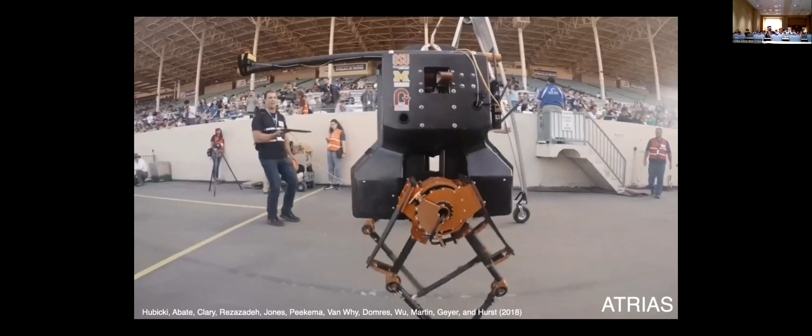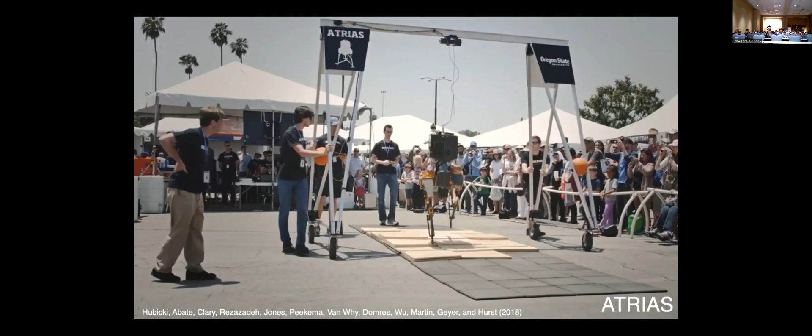In terms of my background, it isn't sort of in safety critical systems per se. My background is in legged locomotion. This was some of my PhD work here, along with several of my colleagues, on this robot ATRIAS. It's a bipedal walking robot. We had it walking blindly over terrain in front of a live audience, which anyone here who's done live robot demos, Godspeed to you.

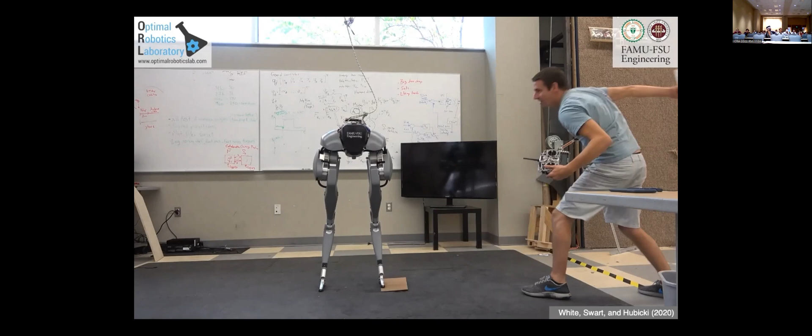And so a lot of my background was in legged locomotion, and currently in my lab we are finding ways to make robots a bit more robust and efficient in moving around. This is my student Jason literally pulling the rug out from underneath our Cassie robot and catching itself.

But a lot of bipedal locomotion, legged locomotion in general, a lot of these techniques have at their core some kind of motion planning. When I say motion planning, I mean trajectory optimization. So something that is at least partly in a continuous time domain, if not a hybrid domain with discrete events. Lots of those. So those are the kind of dynamics that I'm talking about here. So my timer, so I don't go too far over time.

At the core of a lot of these methods, there will be something that looks like a deterministic trajectory optimization, where you'll have some objective function to be defined by you. Sometimes there's an art to that. We try to eliminate that art wherever we can, and subject to a bunch of dynamical constraints and/or task or path constraints, terminal constraints, choose your constraints, whatever constraints you want. Theoretically, your NLP can solve it. If it's convex, it definitely, almost certainly, hopefully can.

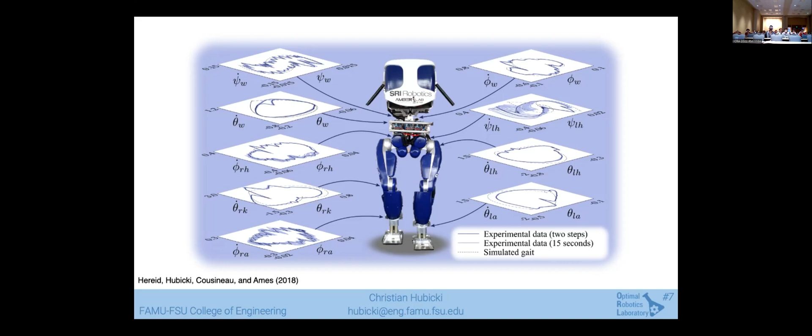So now, what this does in a lot of locomotion is that you will put in a model of your robot, and out will pop a trajectory optimization, these trajectories that more or less guide the motion. And there are lots of formulations for including motion planning into robot control, and they'll come out looking something like this after much tuning and crafting of the controller, right?

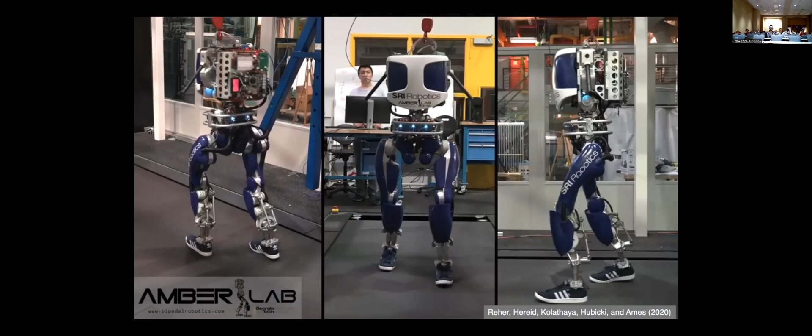So, and in my heart of hearts, I kind of love motion planning and trajectory optimization. So you have an understanding of where I come from with this upcoming method. And I'd like to apply to different modes of locomotion as well. I love to plug two of these ICRA papers that I'm happy to be on with my students and colleagues here. Please check those out. They worked really hard on those.

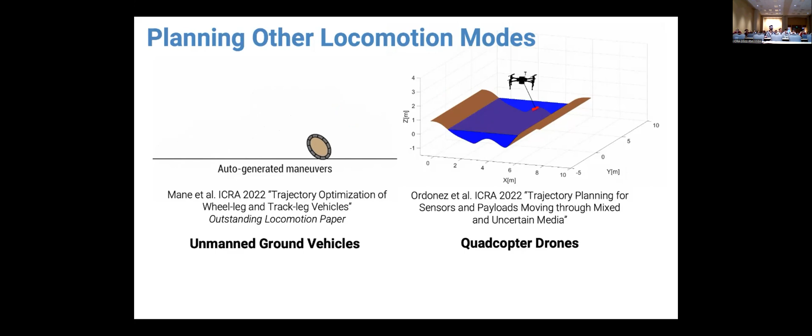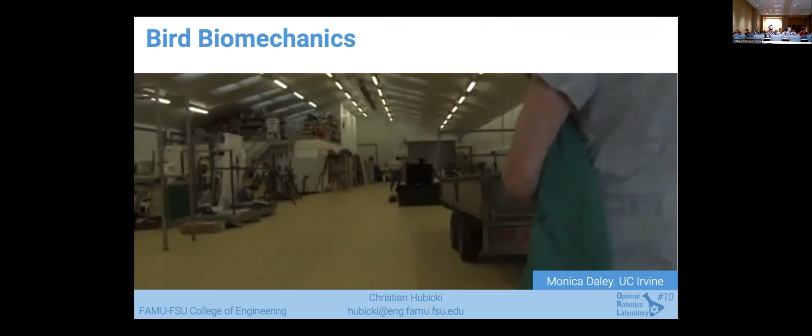But what inspired my work on novel failures and adapting to them wasn't any of these robots. It actually was my collaborative work with this scientist here, Monica Daley. She is a biomechanist, and one of her key research subjects is guinea fowl, birds. And they're amazingly agile runners—it's actually running over a little pothole like there, but it's not even there.

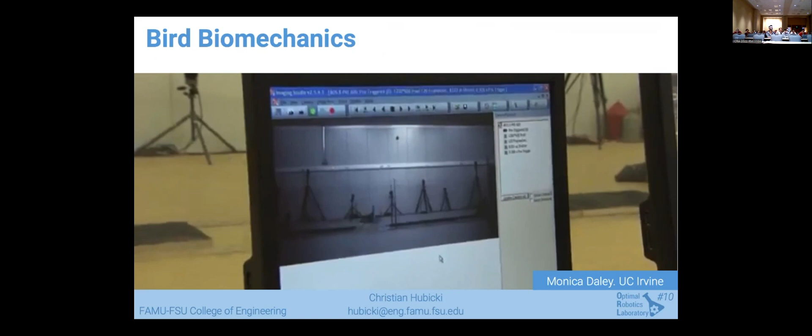It's incredible. It's this inspiration for a lot of the robotics that were involved in my PhD dissertation and many others, a great template for stable and agile locomotion.

And why was I involved with this project? Here's me with my research subject, just for comparison. I work with robots, but the answer is I was involved in using motion planning to try to understand how these birds are as good at moving around as they are.

What do they care about? And hypothetically, if we knew what they cared about, we could formulate a trajectory optimization and reproduce and/or predict their locomotion.

So here's an example of a trajectory optimization of us trying to get a simple bird model rounding a turn. Right now it's optimizing using a nonlinear programming solver to come up with a trajectory that says, oh, good, cut the corner, that's a smart idea.

We would add in certain constraints, right? Things about safety for our locomotion. What's a big one for bipedal locomotion? What don't we want the robot to do? Fall over, yeah, you're exactly right. Congratulations, that's exactly the right answer. So naturally we put that as a constraint in our optimization, something we don't want to do.

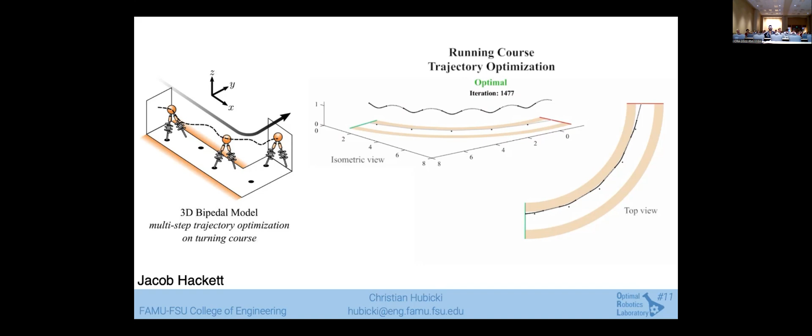So we did this kind of optimization analysis, and Monica set up some experiments of a bird trying to turn around a corner. And we would put the bird in here and kind of encourage it to go.

You might say, yeah, but it didn't mean to do that, it's an accident, it slipped and fell. Well, thankfully, our biomechanist colleagues are really great at setting these experiments up in a way where they try to isolate whether or not the bird seems to prefer falling or not, or will try not to fall. And the way she set this experiment up, there wasn't a strong preference for not falling in this scenario. Falling wasn't a huge deal for it.

What was more important was getting away from the experimenter. You never know what they're going to look like, it could be very scary, right?

So the point is, the mode of failure is a fluid concept in nature, and also in our robots. There are so many ways that our robots can fail, and of course we have to incorporate them all. And the question is, how?

I think we saw a wonderful talk by Aaron on how to use control barrier functions for this process. I'm going to talk about a somewhat different approach, where I want to incorporate modes of failure into deterministic motion planners, so that you come up with these motion plans on the fly, hopefully, so that you can decide if falling is a good idea. We're not there yet, just as a spoiler, but there could be a lot of hope.

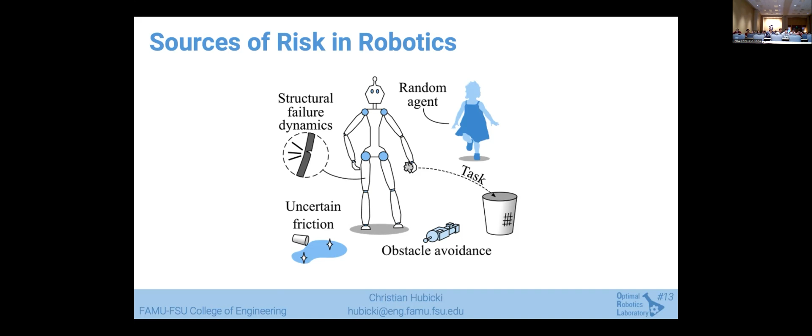This took me in a lot of different directions I didn't expect to go. There's a lot of robots I never thought I'd be working with. So prepare yourself for that coming up.

So our goal is to extend our motion planners to, one, emergently prioritize many sources of task failure, okay? We're going to colloquially call them risks. I'm not going to make grand claims about risk as a metric or a measure, that's not what I'm talking about. I'm going to be talking about probabilities of failure, that's what I mean in the context of this talk.

And we want to adapt to novel failures as they happen, so we're going to want some kind of low shot learning. We don't want to fail 1,000 times to understand how to not fail again. We want to be able to learn and re-optimize in real time on the fly. So we need our motion planners to be fast, preferably somewhere in the millisecond range. So we're talking convex LQPs or LPs if possible, would be lovely to get.

My big picture goal is complete task improvisation. If something changed that made you fail your task, you should be able to say, I understand the implications of that, and behave entirely differently as a consequence.

So what I want is for the probability of failure to shape solutions for our optimizations. I'm considering probability of failure. I'm colloquially calling it risk.

But why probabilities? Why am I focusing on probabilities? I'll give two big reasons. One, it's a good one-to-one way to measure this bad thing can happen, this bad thing can happen. How do I split the difference? If you're putting it in a cost function, you might put a weighting factor on that. You say, I care a little bit more about this than that. And that's fine, but what does that weighting factor really mean? What are the units of that weighting factor? I perish the thought, but this allows a one-to-one comparison that way.

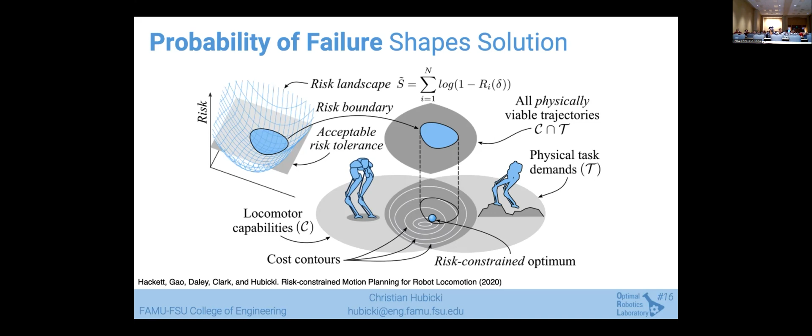So let's move on to motion planning with risk and how we try to go about it. I'll go back to a high school math example. We're going to play, I guess, an optimization game, or maybe just a math game, we'll call it.

We're flipping coins. The game we're going to play is that you got to flip 5 coins. If any come up tails, you fail the task. So the math is pretty easy on this. We're assuming independent probabilities for the different coin flips, so you find a risk of failure probability.

Your risk is going to be equal to 1 minus the probability you will survive, which is going to be equal to 1 minus a half times a half times a half times a half times a half. You all can do math - I trust you all. Somewhere in the 97% range.

And you can compare that to some acceptable risk tolerance. That's a very simple way you can aggregate these probabilities along the course of your trajectory. In this case, your trajectory is number of coin flips. It will then become your progression through your continuous dynamics for your robot.

Or of course, you could seek to minimize probability of failure - I guess you just flip fewer coins if that were an option available to you. So what do you do with that information?

We're going to bring up something we love to call our failure probability function. Not to be confused with the probability distribution - you'll note that area under the curve is not one, is not designed to be one. All it is mapping two things.

The x-axis is that little delta right there - that's what we call a risk source. It's some combination, some function of all your system variables. I don't care what it is - it could be a state, it could be time, it could be control input, it could be a ground reaction force, whatever you want. And then on the y-axis is the probability that you will fail at any given small delta t in that risk source. So that's all that is.

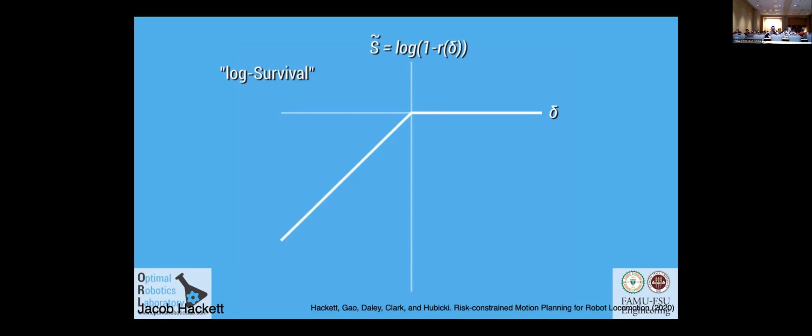Now, if you look at this from an optimization standpoint, you have a piecewise curve, which you can actually represent as a series of linear constraints and slack variables to keep the problem convex. So if you introduce a slack variable on the y-axis, some s-tilde, we call it a log survival variable, and you upper bound it by those two intersecting line functions, then voila, okay?

Any given probability is bounded in this space. We call this log survival space just because. And as a result, it's a convex constraint on our optimization. So we can actually add this into our normal motion planners as additional constraints.

We'll have that first constraint, which would say that I need my safety or my survival probability to be better than my acceptable risk tolerance. That's what that first constraint is. And the second one is just bounding those curves in order to have that convex set of constraints.

So when you boil that all out, you have two different kinds of trajectory optimizations. One that's constrained by a certain acceptable risk tolerance. You could say, I want a 10% chance that I'll fail in this task, or a 90% chance to succeed, or you just minimize risk. Either one is fine. They have their strengths and weaknesses.

And that's how we turn this into a deterministic trajectory optimization problem, even though there are theoretically uncertainties and probabilities involved. How you get that risk probability, that failure probability function, we'll get to a little bit later.

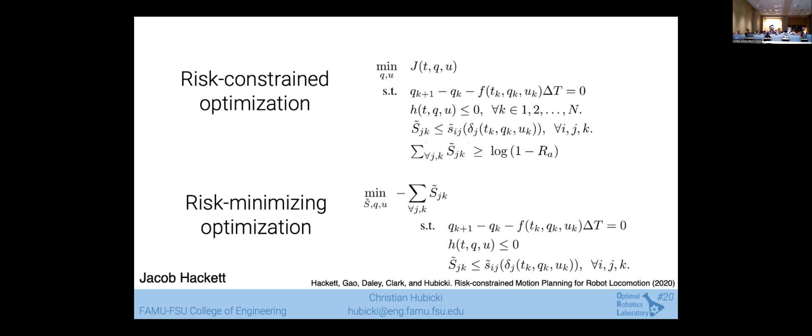So let's go to just a simple toy problem. We went way back to very simple toy problems for this. Just a double integrator—I love to call it Puck World because it's a little puck that slides around. It's kind of like Grid World. And I wanted this double integrator to go from one side of this arena to the other.

We put a little danger zone in the middle. And my student Jacob assigned a probability that you're going to be bit by some scary dog the closer you get to his little dog house in the middle there. And we just ran this risk-constrained optimization saying you could either tolerate a 100% chance of failure, 0% chance of failure, or anywhere in the middle.

And it generated those trajectories. You can see how they become increasingly risky or increasingly risk averse just by changing that variable. And it's just a normal deterministic trajectory optimization.

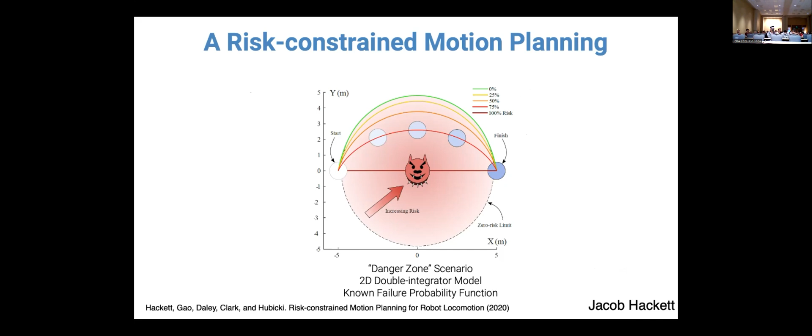And as a proof of concept on a robot, we took it to this very simple hopping robot. We wanted to add a very common way that these robots fail, which is that they break their legs. So we bootstrapped it with a failure probability function for how much overloading a leg may break it.

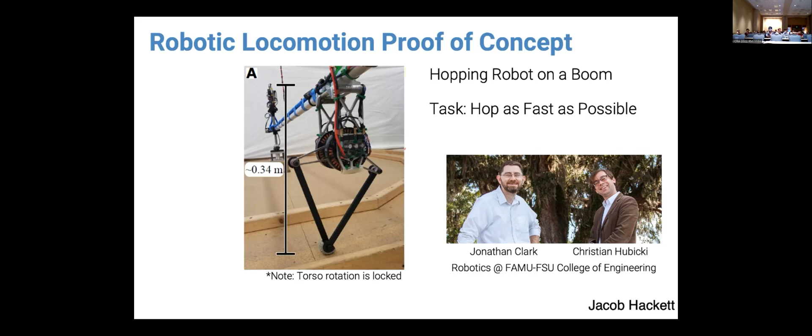And we would give it higher or lower failure tolerances and see how it would behave on the robot while trying to move it as fast as possible. So this is what it looks like normally, just one of our normal nominal gaits. It's jumping around probably close to 3 meters a second thereabouts. It's a simple proof of concept kind of hopping machine.

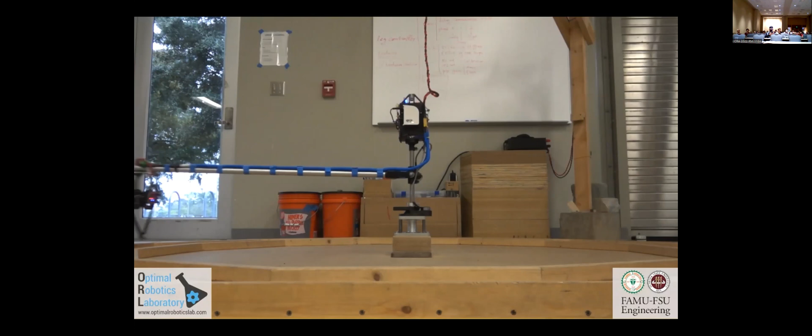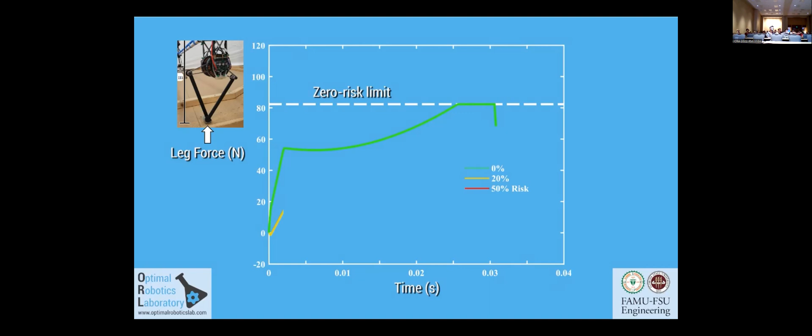And what we did then is we generated a trajectory optimization with 0 risk tolerance. And of course, it goes right up to the barrier of do not cross this—it's a hard constraint. But then if you loosen the tolerances, it'll thoughtfully cross the barrier of 0 risk more and more. And as a result, you'll get some increase in speed.

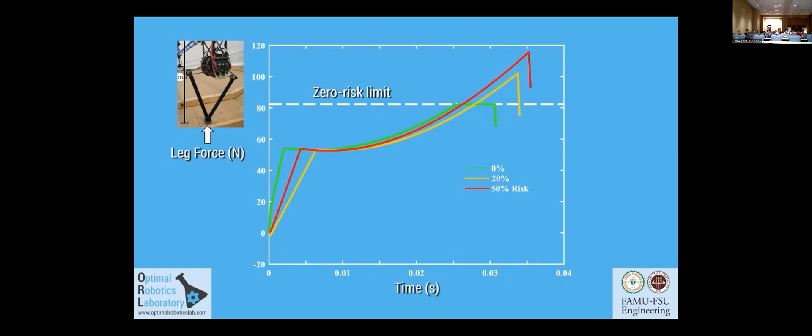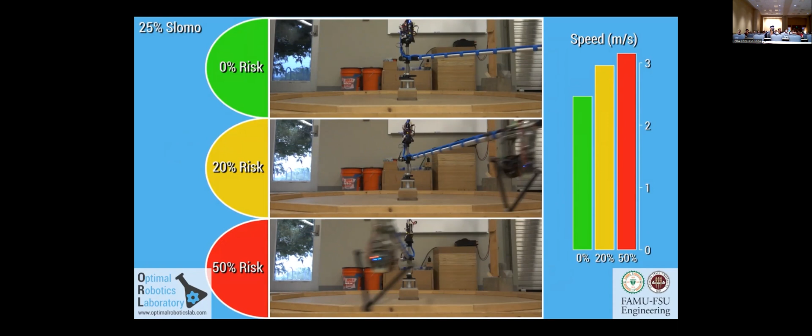Here you have all 3 different hoppers going around. You have the top hopper, middle hopper, lower hopper—ignore the percentage values, they are proof of concept values—but the one at the bottom goes fastest, because it's able to take more risks.

But the big question in here is, how do I define a failure probability function? It's kind of the big catch here, right? And the way we try to do it is learning it in situ.

We wanted something extremely low shot, at least in the simplest way we could go. So we're basically talking about a series of splines and seeing what we can get away with at that kind of simple level of learning.

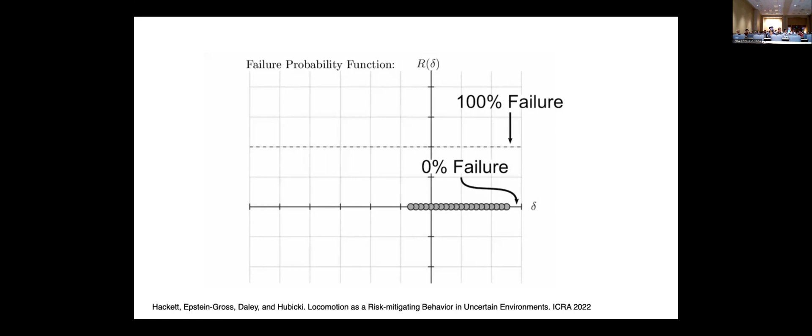I'll give an example of what a learning operation might look like, where we're collecting data over the course of a run of your robot. This is a hypothetical robot scenario where data points fly on the screen, pairing data on our x-axis for some chosen risk source we've picked as a candidate, and we log either zeros for it did not fail, or ones for it did fail. Just that simple. So you roll in all the data points, and you can see it did a couple trials, had a couple failures.

Then what happens is we run a very simple regression, convex, with a linear spline. Simple convex least squares optimization, and then we take the log of 1 minus those values, and transform all the knot points down onto this space. As a result, you have this convex space where you can bound a slack variable on the vertical axis, and then do a bunch of linear cuts to get all those curves that bound the S tilde variable. So now we have this convex formulation of this particular learned failure probability function.

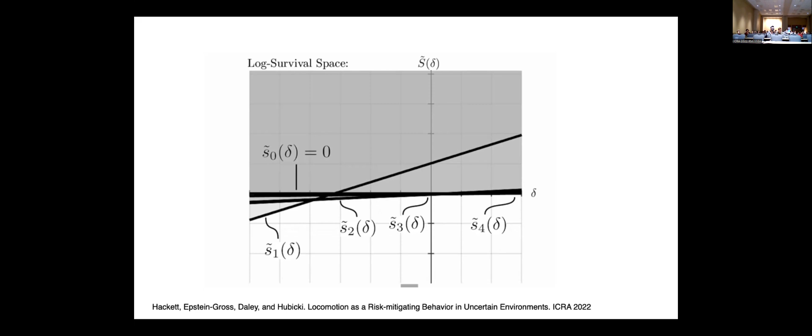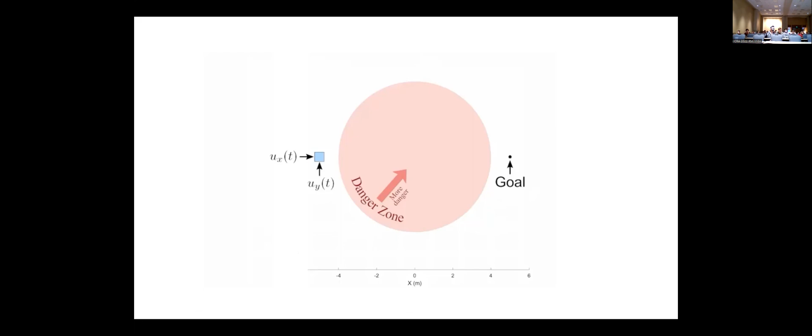So let's go back to this danger zone problem. Again, just a toy problem, and it's the same thing where it's risky to go into the middle of that circle, but it has no idea it's risky. It's naive. We also know a priori that the curve at the top is going to be the best answer, but it doesn't know that.

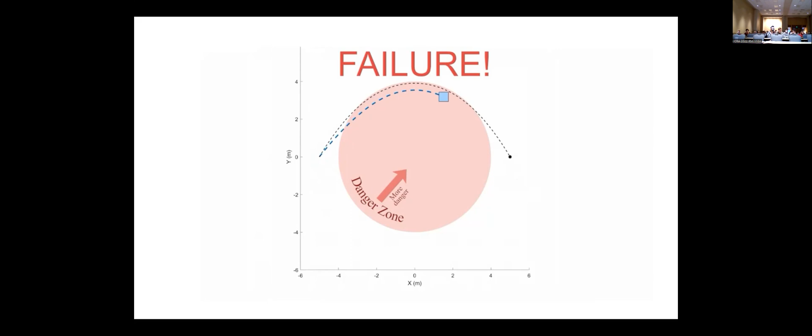So what it's going to do is drive through the middle, not knowing there's a dog there, gets bit, but then tries again. It's a lot closer to the best solution, and basically can just keep iterating until it not only succeeds the task, but succeeds very close to the optimal solution.

And right now, this is technically a nonlinear program that runs in under a second.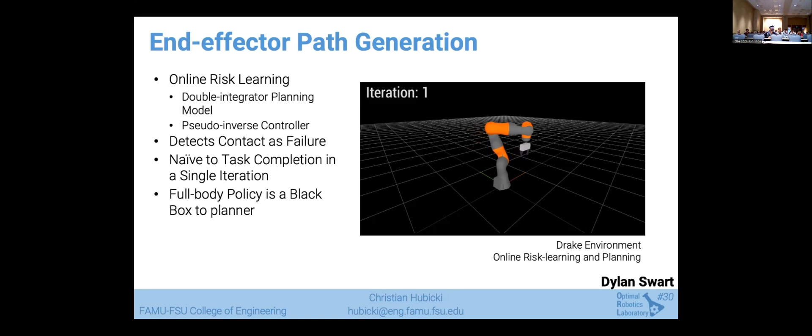Okay, but I'm sure back in some people's minds, it's like, Dr. Hubicki, we're friends here, Christian, how are you choosing your risk sources? That's a great question. So right now, for these proof of concepts, we were just picking them as things that might make sense, and they may or may not be linear in your state variables or all your other system variables.

So wouldn't it be great if there was a way to automatically select these risk sources? That's what we're working on right now, specifically so we can get linear constraints. Because if we get linear constraints and we can have some linearizable or linearized model, boom, we have model predictive control that can run on the fly, picking up and improvising its trajectory on the go.

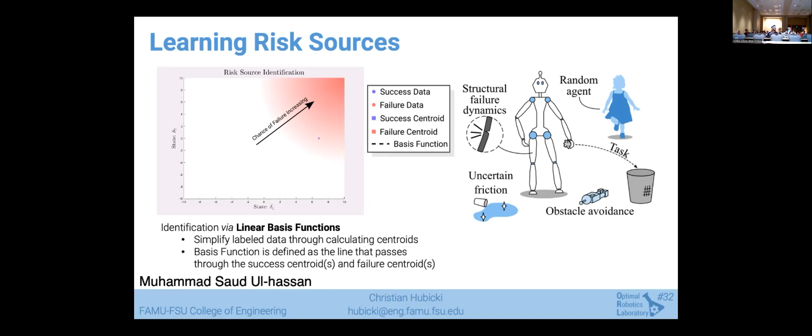One of my students who's now at ATI took this failure data, where you'd have different risk sources being measured, and plotted them. He would then do a projection onto a line defined by the centroids of the failures and successes, showing that with arbitrary potential risk sources, you can throw as many in there as you want. The projection is very efficient, and it gives you what is effectively a basis function for your failure probability function or risk source.

So you could have a number of linear variables. It could be the time spent in your task, or the state 10 seconds ago. You could theoretically throw a lot of things in there. I look forward to playing with this to see what kind of results we get.

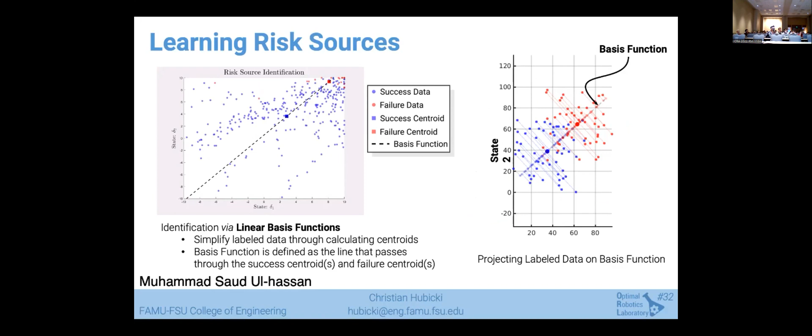But on top of all this, there are things we know we'd care about in real robot space that are not linear in our variables, such as the distance to objects you don't want to run into. That's a Euclidean distance, and of course it's not linear. However, we can linearize it nicely.

We can convexify it with a relaxation by looking at the feasible half space over time, and we can update this half space approximation along a trajectory. It becomes linear in our system variables, which makes it easy to fit into the optimization framework.

It actually performs quite well with a very straightforward task where you're trying to avoid obstacles, in spite of the linearization. So we chose obstacle avoidance as a test case here. Naturally you don't want to hit obstacles generally, but this is a good test for us to see if in the future we can do these distance-like metrics in a linear fashion and fit them into our risk formulation.

This turned out to be a pretty good indication. You can see our little model predictive controller is pretty good at dodging around stuff in both single and multi-agent settings. We have no formal guarantees or barrier functions or the like, but it seems to work pretty well getting around. Again, this doesn't have a risk formulation in it—it's doing an obstacle avoidance maneuver, but it's convex thanks to the relaxation.

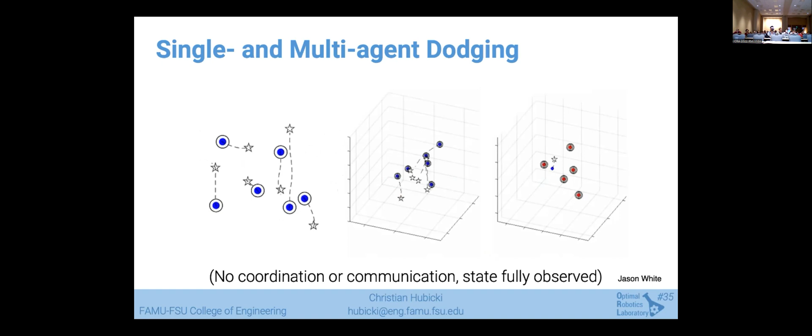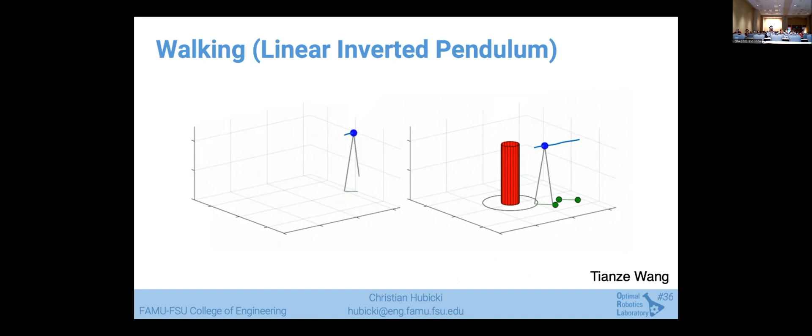And of course it applies to other modes of locomotion as well—here's your walking linear inverted pendulum, which is nice. So it applies to walking locomotion too, and we can plan around these. It's automatically generating these center of mass motions and foot motions.

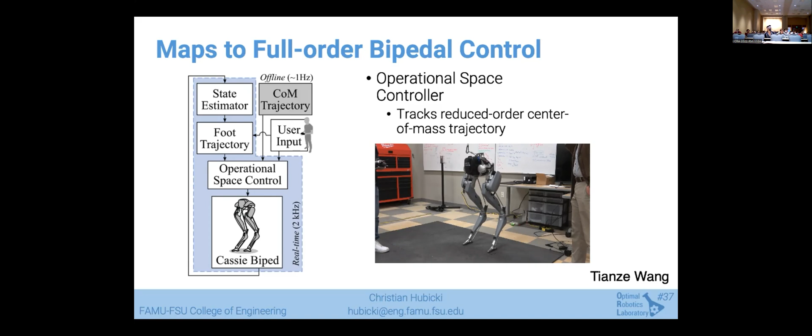We have controllers we're developing that will track center of mass trajectories and foot trajectories. This is some work by my student Tianze, who's been making these operational space controllers track these desired trajectories. So the idea is we have these reduced order models do the learning, and then fit it so the high order models can track them. But these are simulation results here.

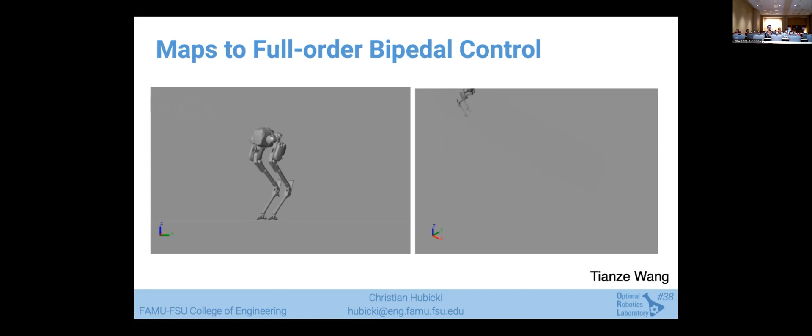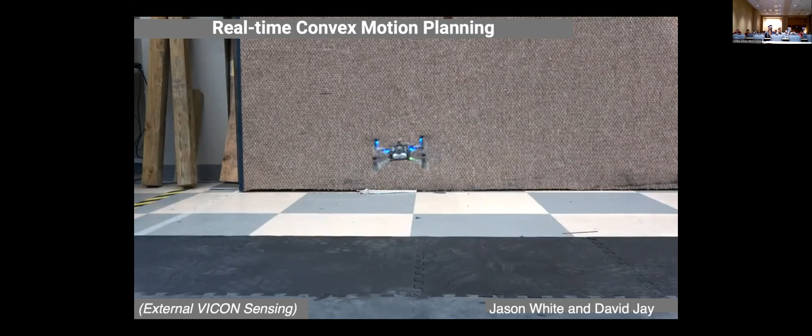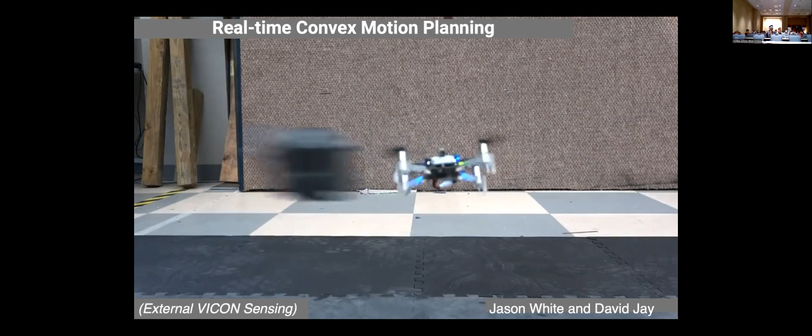In order to get hardware results, we decided to play around with some drones. We decided to start swinging some pendulums at it, and it's pretty agile. The point here is to show that it's actually really effective—the online MPC is pretty darn effective at dodging around this drone, dodging around this pendulum we're swinging at it. The sensing is external, to be absolutely clear. Here's a little slow motion footage of it, in case you missed what was going on—you can see the Vicon markers on there.

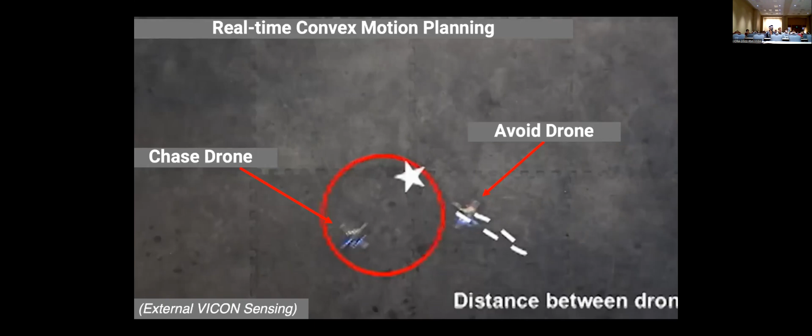So we decided to take that and extend it to, hey, what if we have a robotic task where the game was tag, with a chase drone and an avoid drone? We use the same formulation, and it's pretty agile and pretty reliable at getting around in this 2D setting. I was very, very proud of what my students were showing with this—I couldn't stop watching it. This shows that the linearization, the convexification, is pretty effective for online MPC.

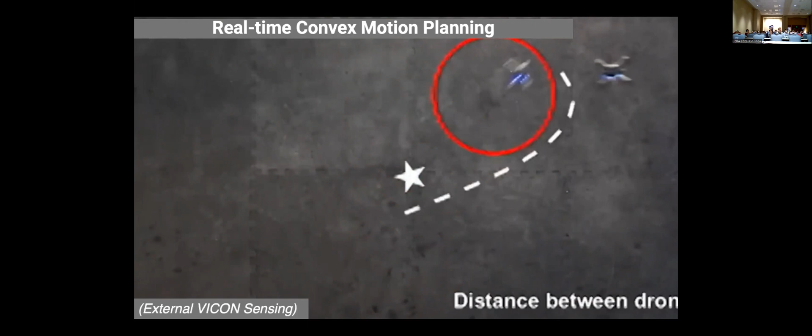And it extends to 3D—that's not a mathematical challenge at all. It's more of an actual robot challenge, since the downdraft was getting in the way of the robots.

But that's a different thing. And so just to wrap up here, we were nearing the end. So now we have all these components together. We're starting to finally combine all of this with our risk learning on pieces of hardware.

So this is a test we got like 4 days ago. It's very preliminary, but basically this drone is completely naive to the world. Then we take the stick of doom and we move it to the thing, and it goes, oh, I failed. Okay, jumps down to the ground.

Okay, all right, then it learned, and it's gonna go, oh, try again. We put in the stick of doom, and it's like, at least it knows, hey, I don't like the stick of doom. And we're not being very aggressive with the stick of doom.

This is very early in our process here. And it's just jumping around, and you'll see it kind of zips around a little bit when it feels cornered. Okay, but we have some more tuning to do.

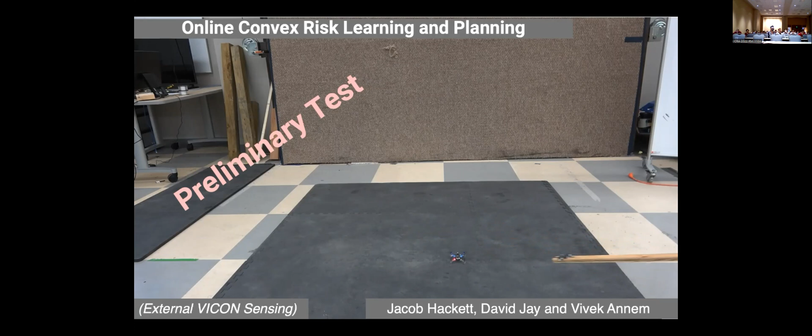I have to say, I'm very proud of my students. They did this all on a very tight deadline for me. I'm very appreciative. So that's where we are in terms of hardware results.

So I'm going to go up to my closing remarks here, because it's all ongoing, and I'm very excited where it's happening. So what's going on right now? One, I want to point out that at this point, I think we're able to convexify pretty much everything, just about everything we need. So that way we can do all these computations on the fly, learn on the fly, replan on the fly.

And I'm sure some of you are thinking, I imagine these other methods that we talked about are really helpful. Do we really want to have to run our robot into grandpa to know it's a bad idea to run into grandpa? No, we do not.

But there's no reason you can't put CBFs, control barrier functions, in. There's no reason you can't do that in the same optimization problem. You can even put your chance constraint methods in there. Anything that can fit in a constraint in an NLP or a convex program can fit in this as well.

Not that it should play along nicely. And what gets me most excited is this idea of going from naive to performing close to a blink of an eye, or at least within the attention span of a human watching the robot.

To be able to give it a task that it might not even know, but then all of a sudden you tell it failed at the task. Then it starts to regress, oh, what did that mean?

And what I want to do is take our Cassie robot and have a drone come up and plunk, and we tell it you failed. And then it realizes it has to play tag, and the drone is it. And so that's the big picture of what I want this framework to do.